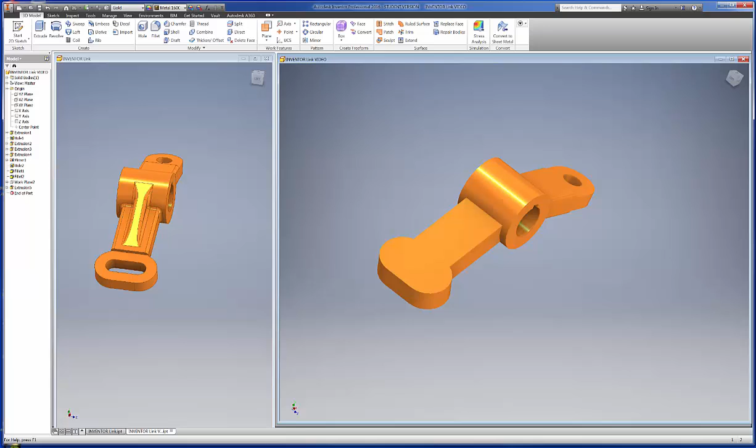Okay, for the next section of the video, I guess we'll concentrate on getting this cut out in here first, to cut that down to a 1/2 inch, I believe it is, and then we'll cut out the center section. So first thing we want to do, I guess, is create a new sketch plane on this face here. And if you don't like that, you could rotate it around, but I'm just going to leave it where it's at. I'll create a rectangle,

and I'll just give it something like that. And I can go ahead and create a constraint of collinear between this line and this edge, and then I want to create another constraint of tangent between here and there. This line tangent to this arc,

and then finally we've got to create this line, find out where that line stops, and again we're just going to have to make an assumption, I guess, that it would be 3/4 of an inch. I don't see any other dimension on this drawing, so we'll assume that it's the same distance as it is here. So I'll give a dimension from the center out to this line. Oops, that's my center. There we go. About 0.75.

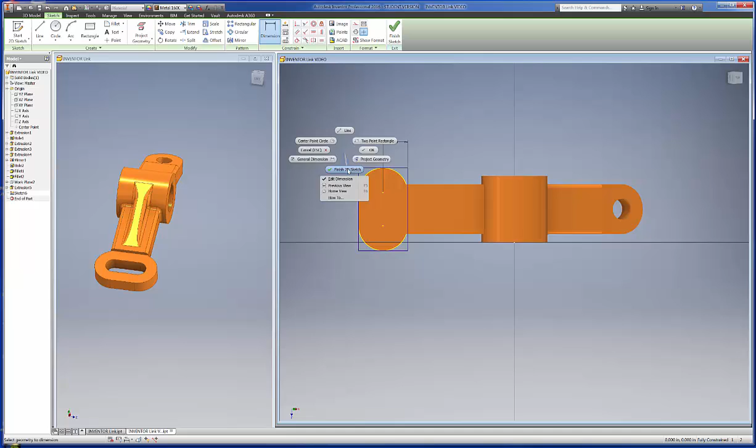And we'll go ahead and cut that out. So we'll finish the sketch, and we'll do an extrude cut, of course. And again, I didn't change all these back to construction, but I'm just going to go ahead and make that square, that rectangle, and I only want to do that in 1/8 of an inch. And we'll cut that out. And of course, I'm going to hit save.

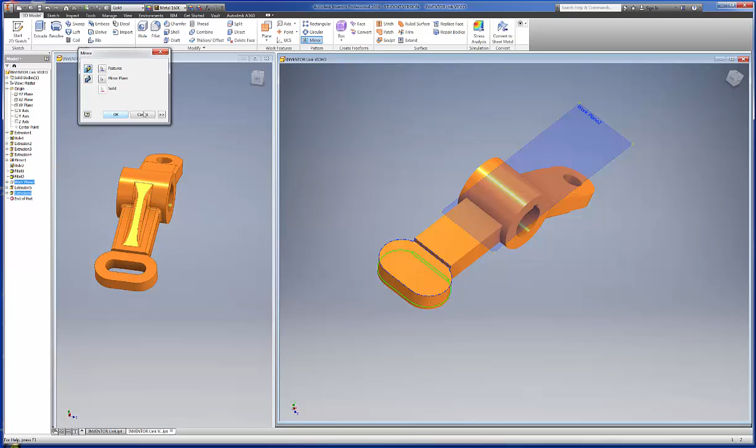Then we'll go in there and do a mirror like we did before. So the features would be the last feature we created, and the plane is going to be this work plane right here, and that's our original plane to create that extrusion. And we'll just hit OK, and we'll note that that's cut out. So that's the only way I see that. I don't see any dimension otherwise, so I'm going to have to make a little bit of an assumption, I guess. So we'll hit save again, of course, and now we can create the cutout through there.

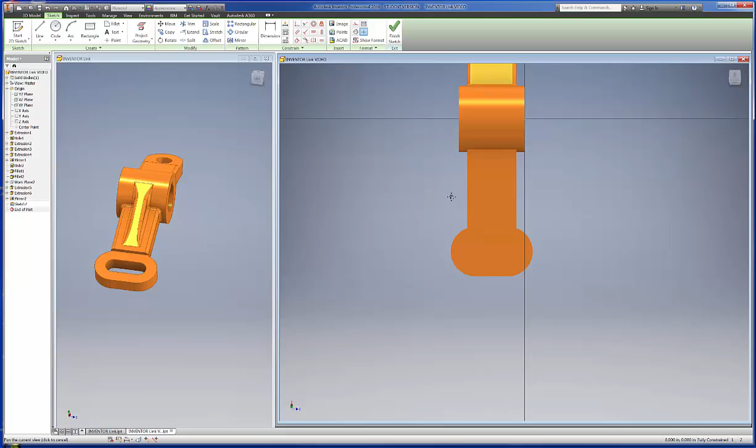So I'll go ahead and do a sketch on this plane, and we'll draw a circle, and I'm just going to draw it anywhere out there, and I'll draw another one anywhere out there, and we'll go ahead and make those concentric. This arc, excuse me, this circle concentric with this arc and this circle concentric. And I could draw some lines, but yeah, I'll go ahead and draw some lines.

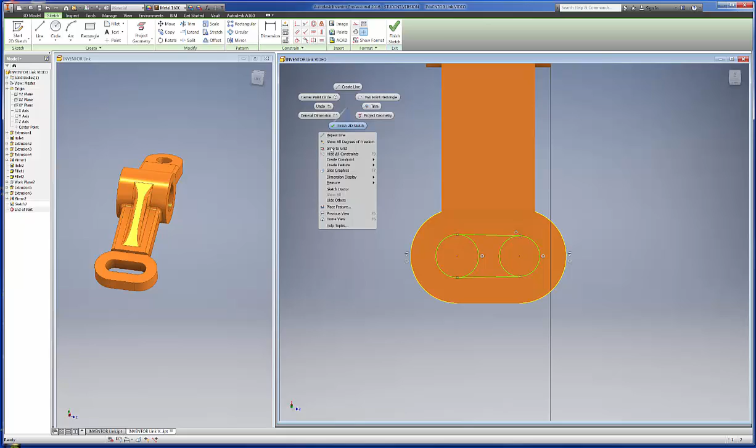And we'll make this one, and we'll show the constraints, and we can see we've got a tangent here, and those are concentric, but that's about it. So we'll go ahead and create some constraints here of tangent here and there, those two, and then finally these two, and we can trim out this and that, and we'll add some dimensions now.

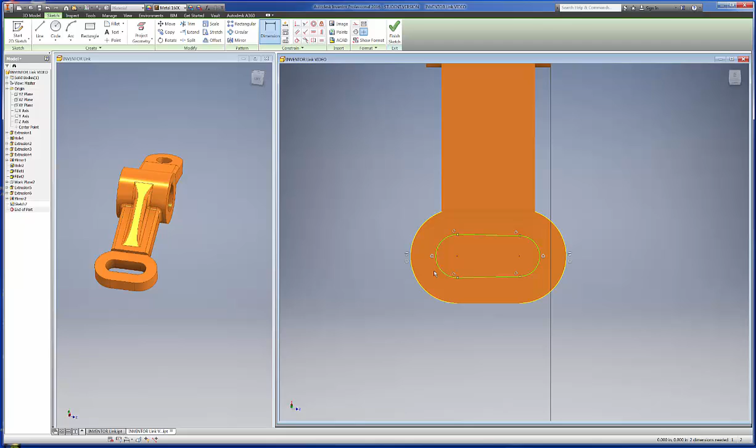This is going to be a radius of 0.6, oh, that's a diameter of 0.625, so that radius would be, let's see, 5/8 would be 5/32. That's not right. 5/16, sorry. Half of 5/8 is 5/16. And we'll go with a 5/16 here, which would be 0.3125. And that thing is all defined.

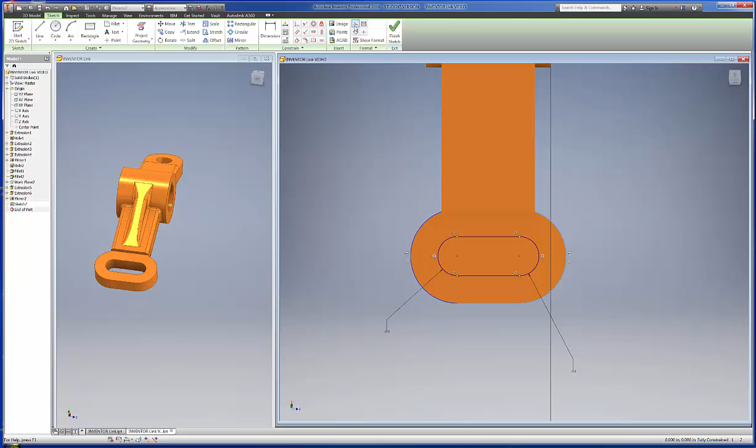So we'll go ahead and click on this arc and this arc and make those construction so there won't be any confusion. Looks like I missed one maybe. And we'll extrude, cut, and you can see it's already there, and we'll just do that through all. And then OK, and we'll hit save again. So that takes care of that.

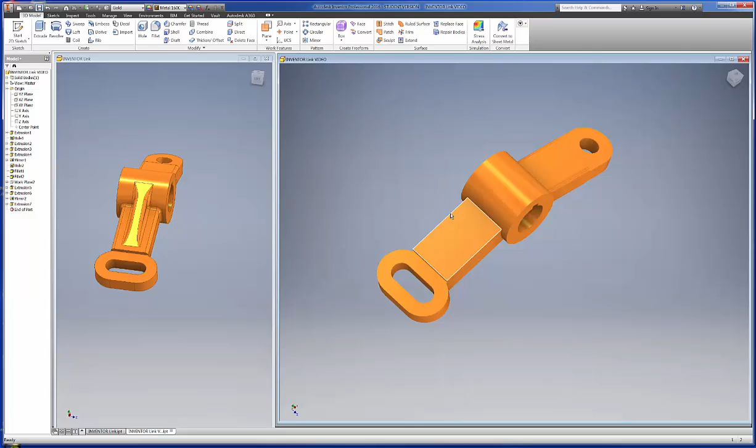Now we'll stop the video there, and then we'll do the rib on its own separate video. So that's where we'll end up.